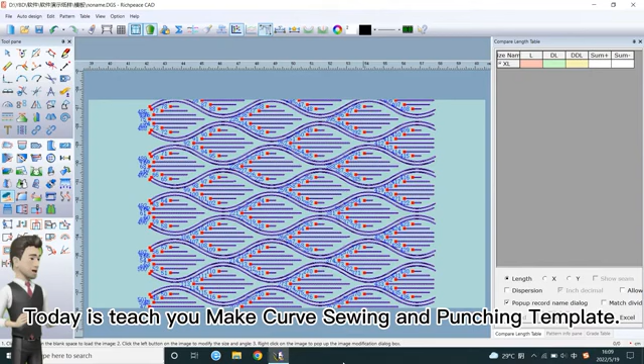Make this shape. Draw two horizontal lines. The distance of the line is the same as the height of the curve.

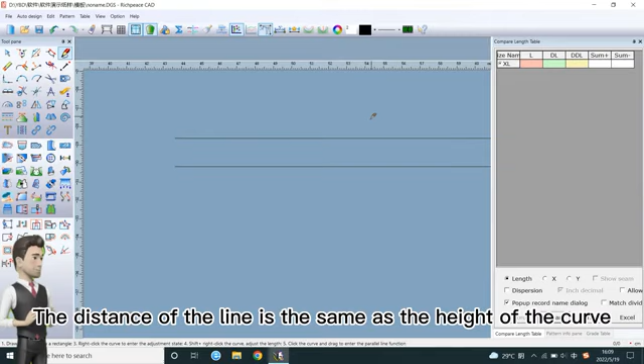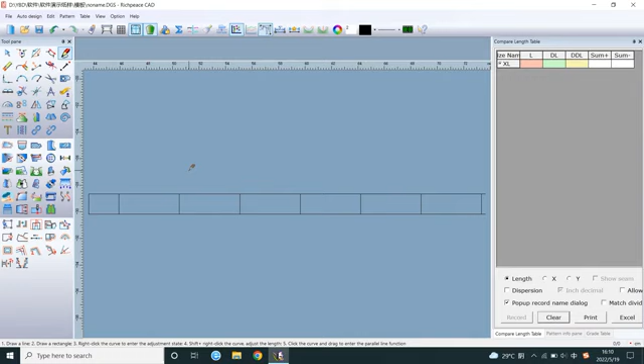Draw vertical lines. The distance of the line is the width of the curve. Draw curve on the horizontal and vertical lines.

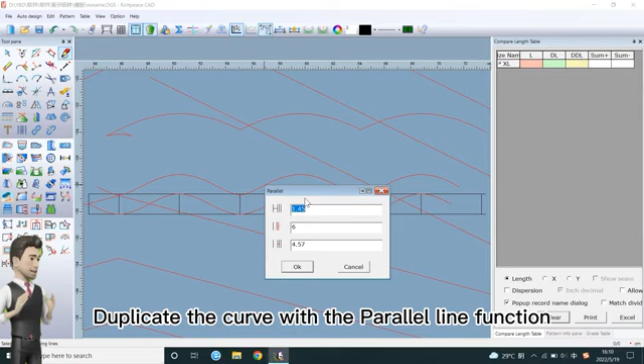Duplicate the curve with the parallel line function. The spacing is 0.3. Number is 1.

Draw a horizontal line. The distance is 0.62. Length is 0.4.

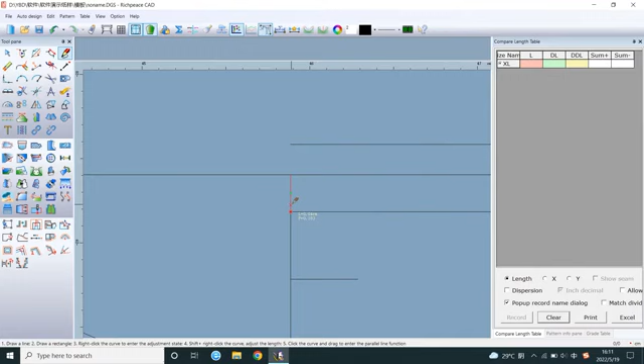Draw 3 horizontal lines, separated by 0.4. The lengths are 1.2, then 2.8.

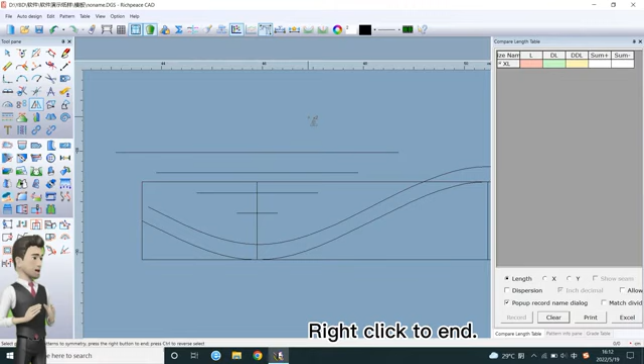Symmetric replication with the mirror tool. Click on the axis of symmetry, select lines. Right-click to end. Use it to connect lines. Left-click to select the line, right-click OK.

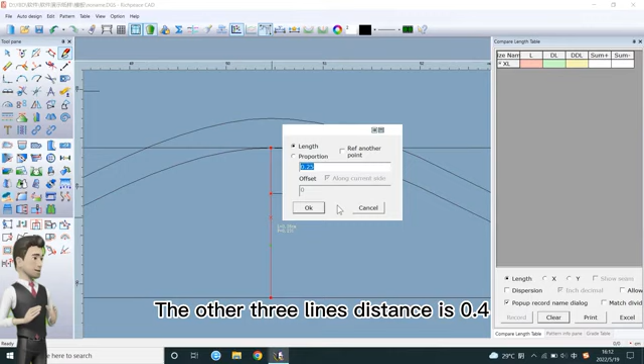Draw 4 lines again. The first line distance is 0.47, and the length is 0.4. The other 3 lines distance is 0.4. The length is 1.2.

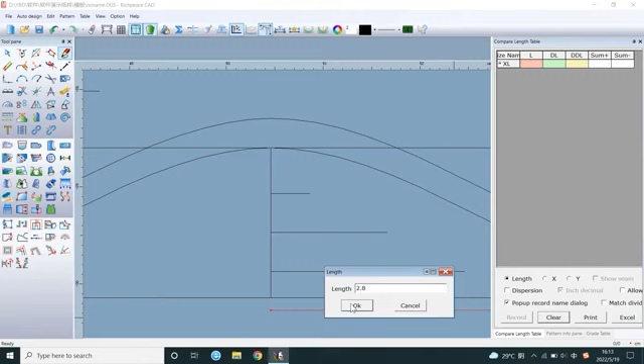2, then 2.8. Symmetric replication. Connect lines.

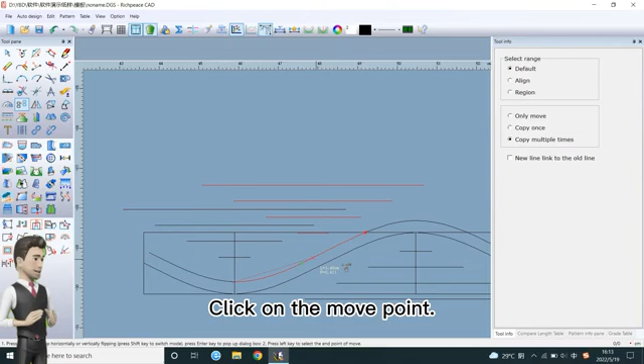Use Move tool to copy lines. Left-click to select lines and right-click OK. Click on the Move point. Click the intersection to copy.

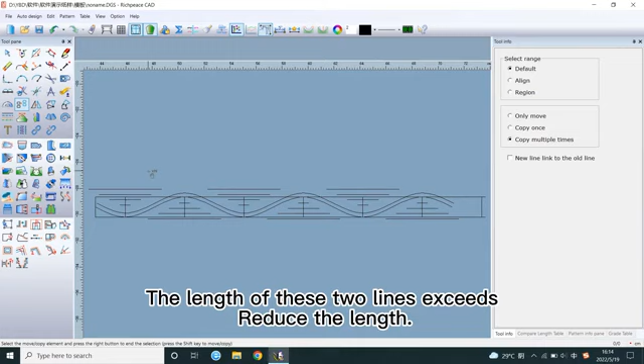The length of these 2 lines exceeds. Reduce the length.

Select the Intelligent Pen tool and press Shift. Right-click on the left side of the line. Decrease 0.8.

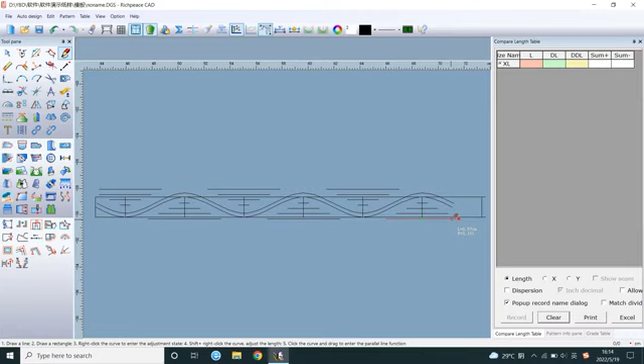Delete auxiliary lines.

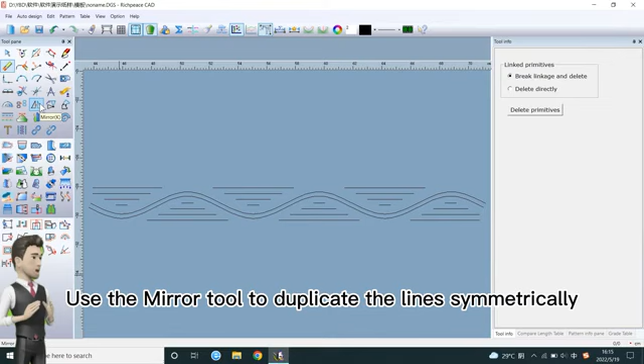Use the mirror tool to duplicate the lines symmetrically. Left-click on this line to become the axis of symmetry. Left-click to select lines.

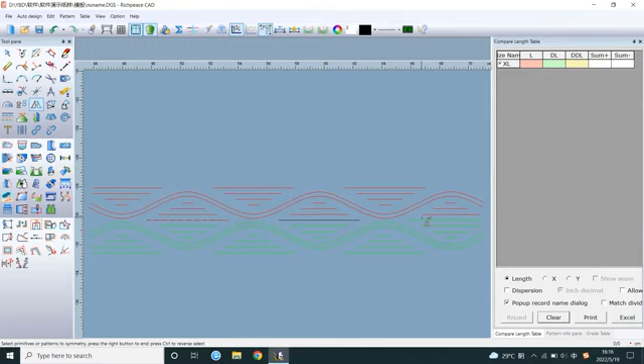Don't select the axis of symmetry, otherwise the lines will repeat. If multiple selections are made, left-click on the line to deselect it. Right-click to confirm. Same way.

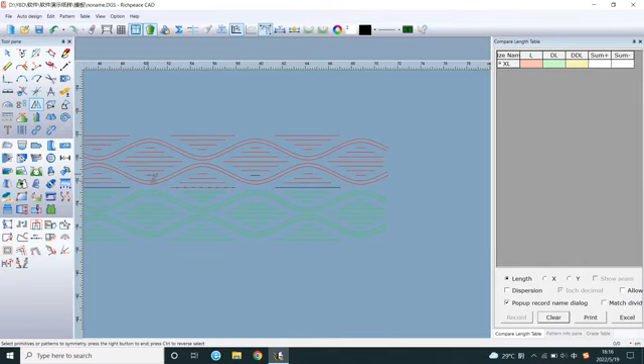Delete excess lines. Draw a rectangle outside.

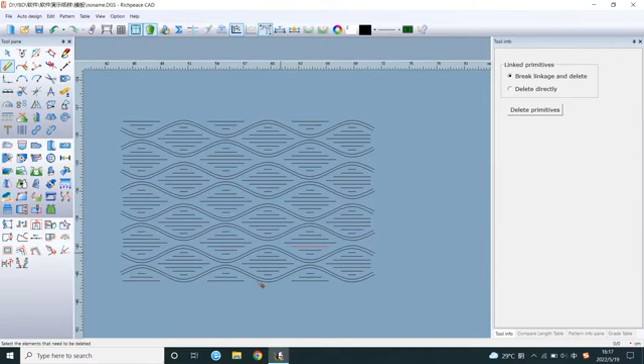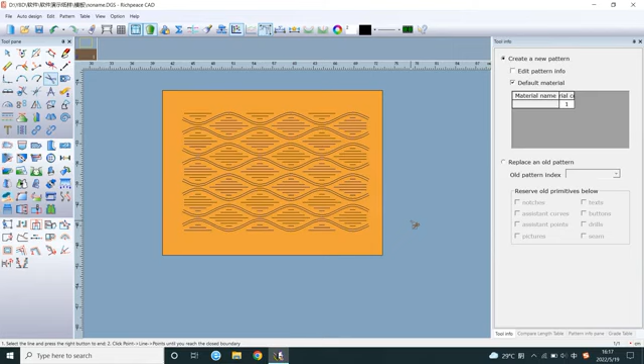Use Forfex to make pattern. Select the sewing template tool for sewing and punching. Select punching lines.

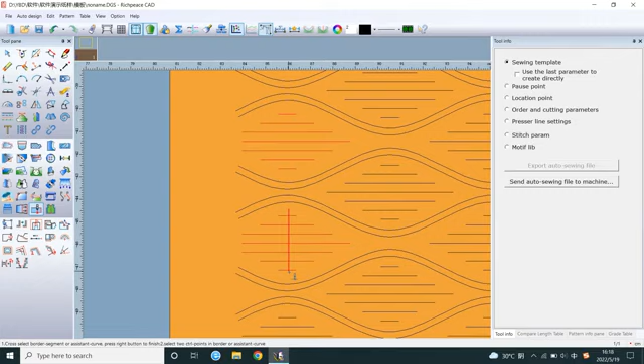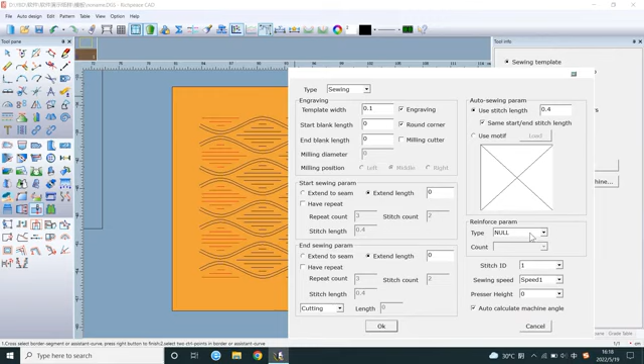Right-click to display dialog. Setting parameters. Number 2 is punching.

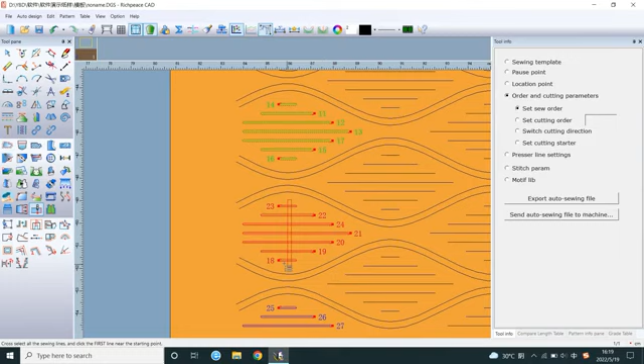Select the order function to set the line order. Box select punching lines. Right-click to confirm.

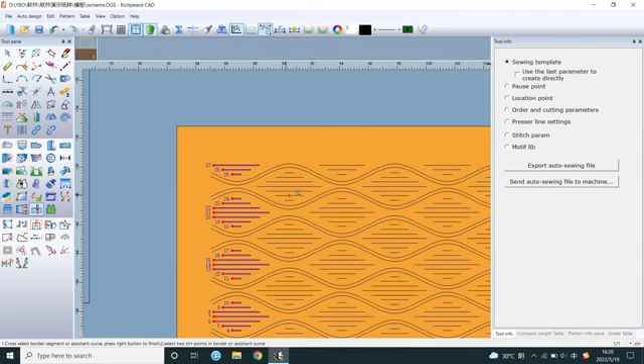Left-click on the first line. Choose both. The setting is completed here. And then other punching lines are set.

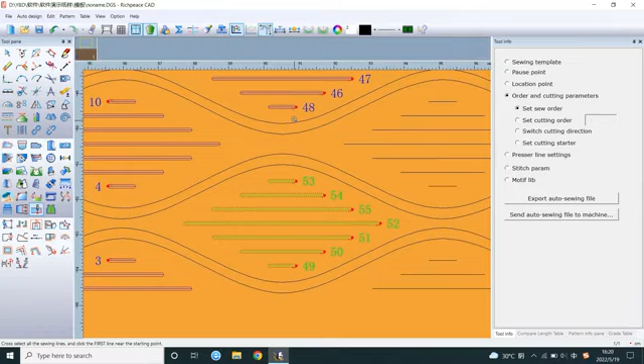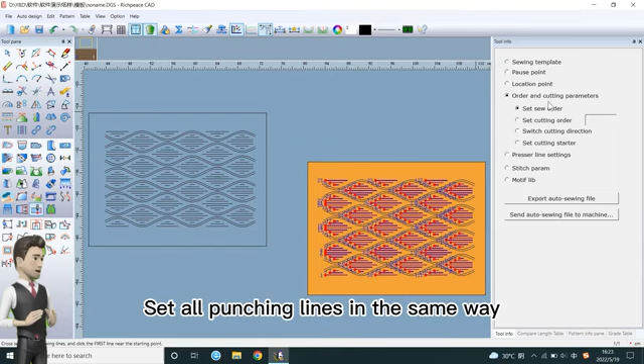Select the location point function and click below the first line. Select the pause point function, click here. Add pause point.

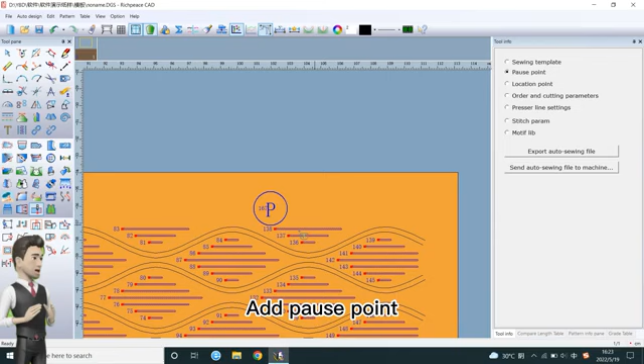Set sewing lines now. Same way. Setting parameters. Choose number 1.